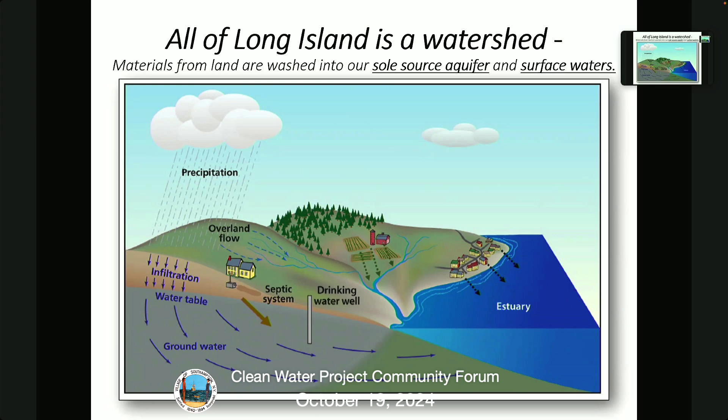Things have changed a lot here in the village of Southampton, in Suffolk County, in the town of Southampton. This is indicative of that, the population growth of Suffolk County from the 20th century through to today. As it turns out, at this point, Suffolk County is the third most populous county in all of New York State. It's Brooklyn, Queens, Suffolk County. And Suffolk County, actually, since 2020, is the only downstate county to have grown in population.

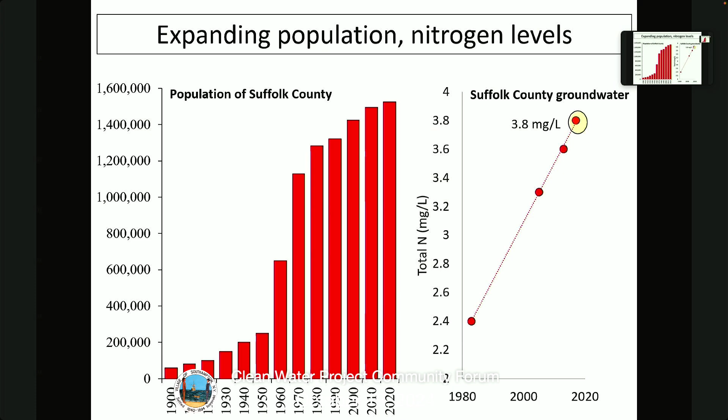All the 5 boroughs shrunk, Nassau County shrunk. You may know New York State is a shrinking state, right? We lost representatives to places like Florida and Texas. But Suffolk County continues to grow. And with that comes changes to the quality of our groundwater, shown here in the rising levels of nitrogen in our groundwater.

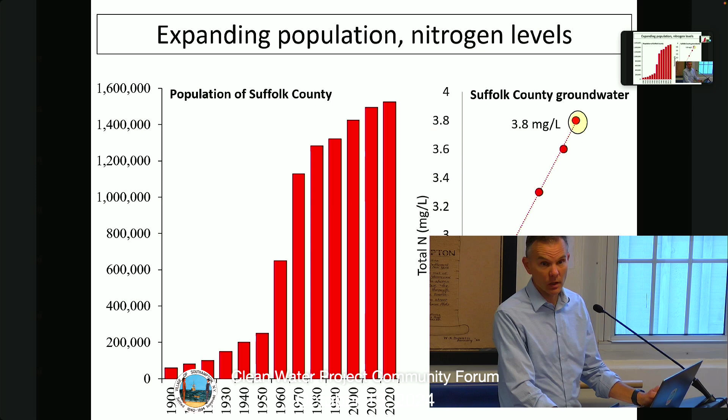That rising level of nitrogen can have a big effect on coastal ecosystems. They can stimulate algal blooms, and the algal blooms, as they decay, can starve our coastal waters of oxygen.

I'm going to focus a lot on Lake Agawam, but what I'm showing you here is a map I just finished preparing in collaboration with help from the Nature Conservancy. This is monitoring my laboratory has been doing during the summer of 2024, data hot off the presses, June through September. It shows the widespread nature of harmful algal blooms and hypoxic zones, also known as dead zones, areas with low levels of oxygen. These all come from the overloading of nutrients, specifically nitrogen, into coastal waters. Lake Agawam is called out for low oxygen at times and blue-green algal blooms, but it's not alone. Here in the South Fork, many areas are experiencing both low oxygen conditions and blue-green algae blooms.

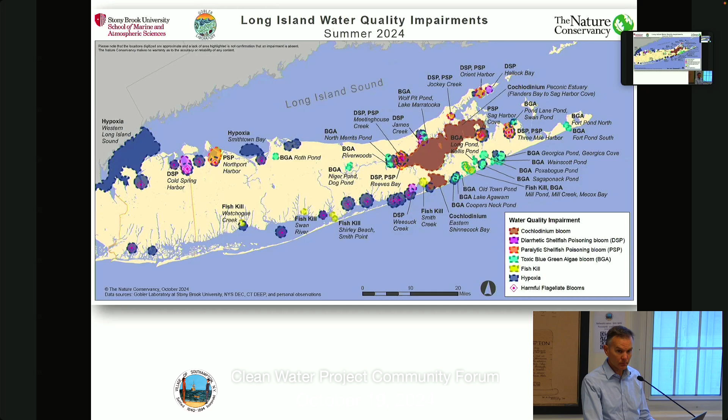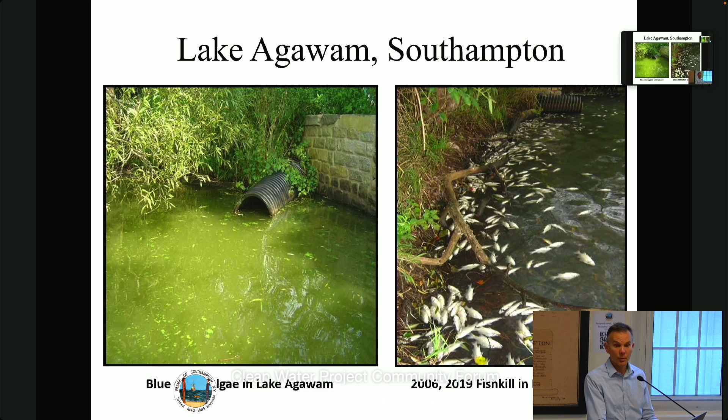Now to put the focus squarely on Lake Agawam, I've been studying this lake for more than 20 years, and it has a long history of these blue-green algae blooms, which I'll explain, and also even fish kills that have occurred because oxygen levels have gone literally to zero at times.

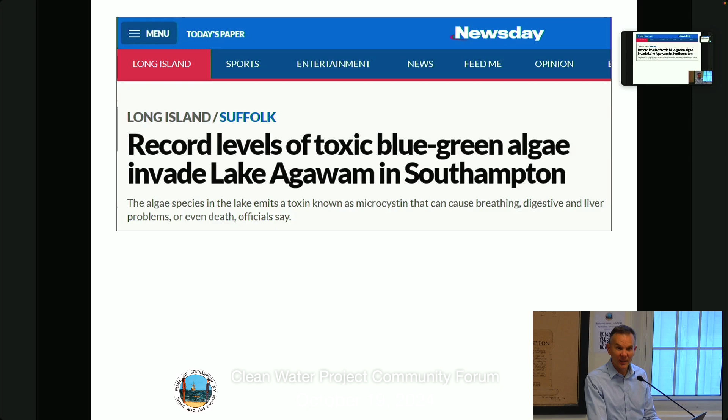It's been notorious. Here's a headline from 2018 — the thing you don't want to see in the news, or want to make news for: record levels, but the wrong kind of record. In this case, toxic blue-green algae. This is from 2018, showing across New York State the top 10 lakes for the number of weeks they've been listed by the DEC for having blue-green algae blooms. Below you see the pictures — they're not fun to look at, really. Again, this is from 2018. There's been a little progress since then, and I'll talk about that.

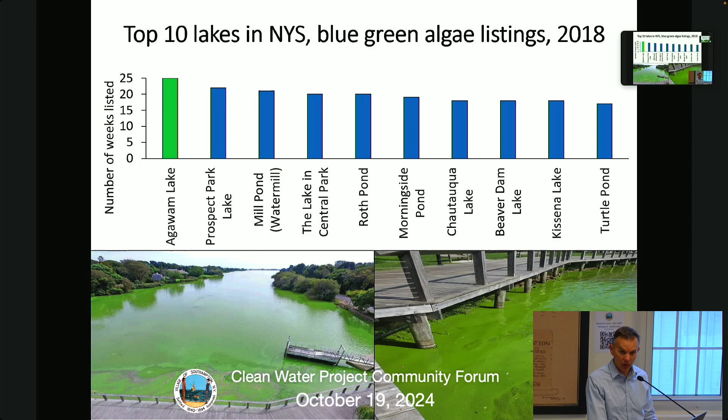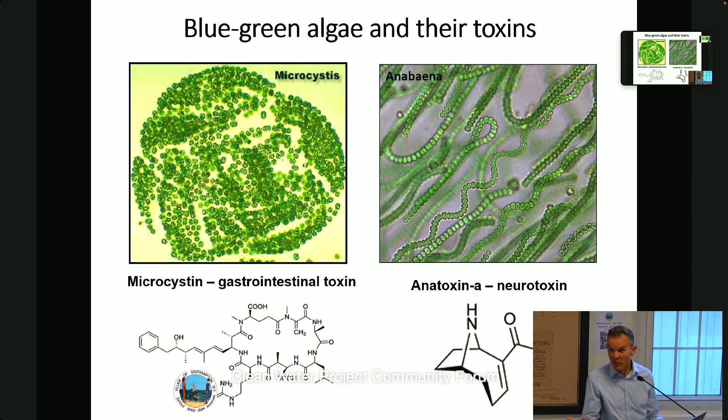Just to hone in on what these blue-green algae are, here are microscopic images of the two most common types. They're worrisome because they make toxins. The microcystis on the left makes microcystin, a gastrointestinal toxin. Anabaena, which is less common in Lake Agawam but has been there, makes a neurotoxin called anatoxin A. When these toxins were first identified by scientists, the pejorative terms they used were fast death factor and very fast death factor, because when they isolated the compounds and administered them to mice, which is how it was done back in the day, the mice died fast and very fast, respectively.

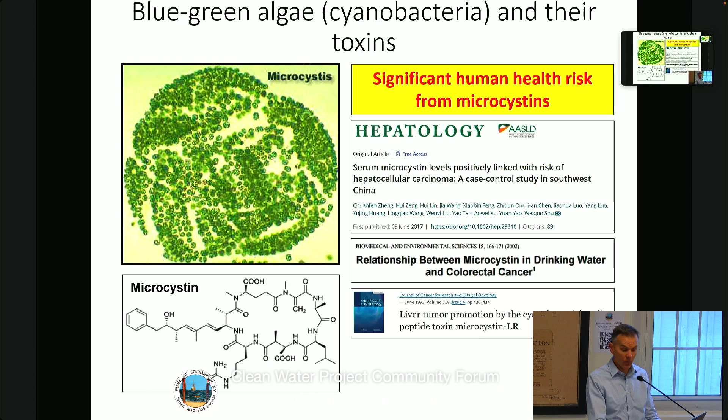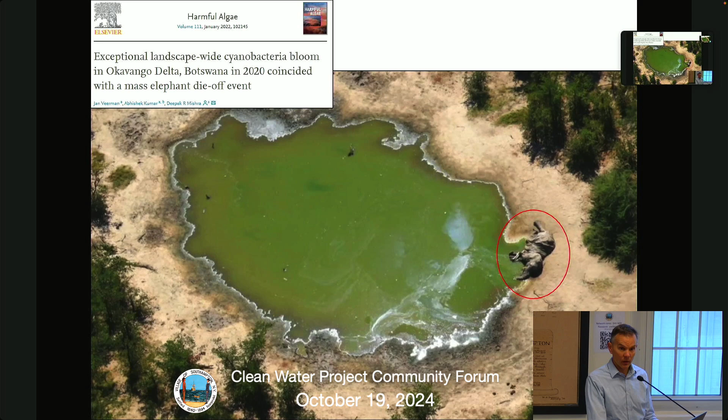So these are serious compounds. They have human health implications with regards to promoting cancers. Now, thankfully, we're not drinking the water from Lake Agawam, but that's obviously a troubling outcome. Outside of humans, these toxins can be dangerous to animals. Not many years ago in Africa, there were events where these blooms led to the death of endangered elephants, very large mammals. And mammals more dear to our hearts, pets — specifically dogs — can be very vulnerable to these blue-green algae blooms.

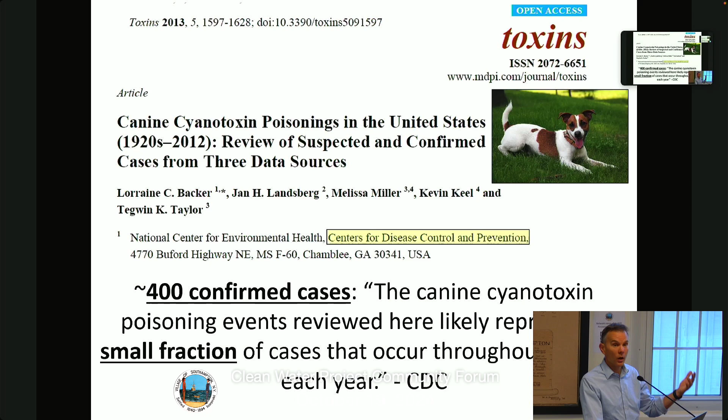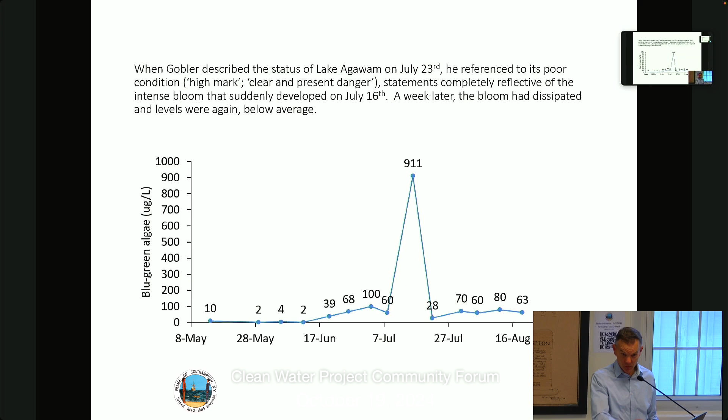Someone questioned, I'll be honest, my integrity when I said later in the summer that Lake Agawam was improving. Here's the data to show that it was improving, what I was speaking to. So again, when I say clear and present danger, this is what I was referring to — this lines up exactly with that data point the week I was speaking. And when I said Lake Agawam had improved, here's the data that I was referring to.

When I spoke in August, on average for 2024 up until that point, Lake Agawam had actually seen its best year in a decade. Still, a lot of work to be done, however.

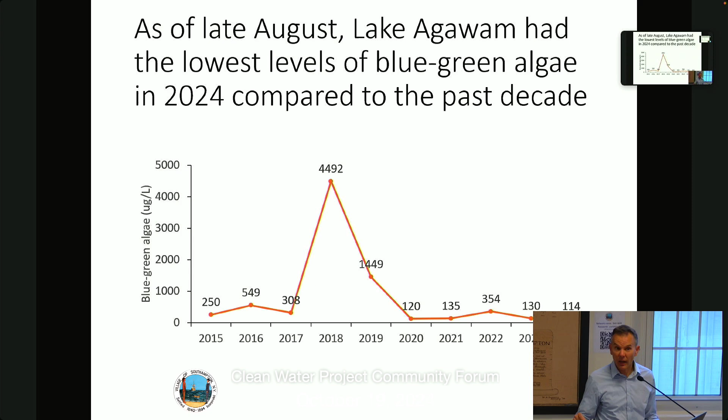First, note 2018, that record-setting bloom in the headlines of Newsday. You see where that landed. There has been progress since then, but there's still a lot to do. To get below the level the DEC wants to see Lake Agawam at, below 25 micrograms per liter, we're still fourfold over, so there's still a lot of work to be done.

So let's talk about some of the work to be done. But before that, just to point out one thing: what's controlling these algal blooms. In the literature, you could see it might be nitrogen, it might be phosphorus.

We've done these experiments over the years, and this is a simple experiment where we took water from Lake Agawam, added nitrogen (N), phosphorus (P), and then nitrogen and phosphorus together. What you see is a very strong increase in both the total phytoplankton community and microcystis, that toxic blue-green algae, from nitrogen. And phosphorus, no — if you add phosphorus to the nitrogen, it's about the same outcome. So it's really the nitrogen that is a big driver here.

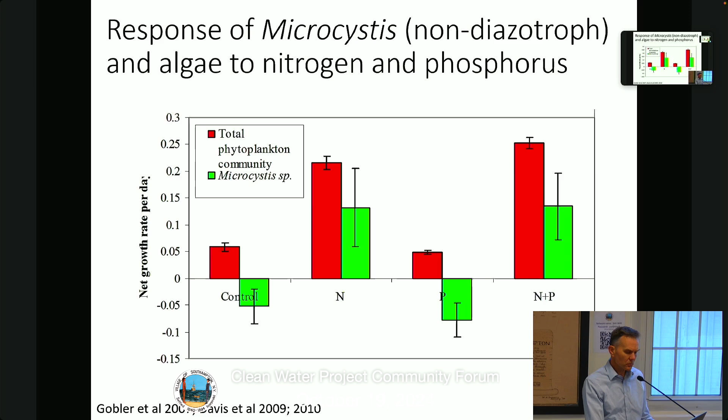We've done studies with regards to where the nitrogen's coming from, and this is how it all breaks down. The big answer is wastewater. Wastewater from Main Street, wastewater from around the watershed, wastewater from the homes around the lake. There's certainly a component of fertilizer, but wastewater is the very strong source here.

Chris, can you mention how far north or how large is the watershed for Agawam? It goes as far north or even further north than Sunrise Highway. I'm going to show some pictures later — there's an image of it over here, but I have a slide showing it later. It's a good question, and I'm going to talk more about that later.

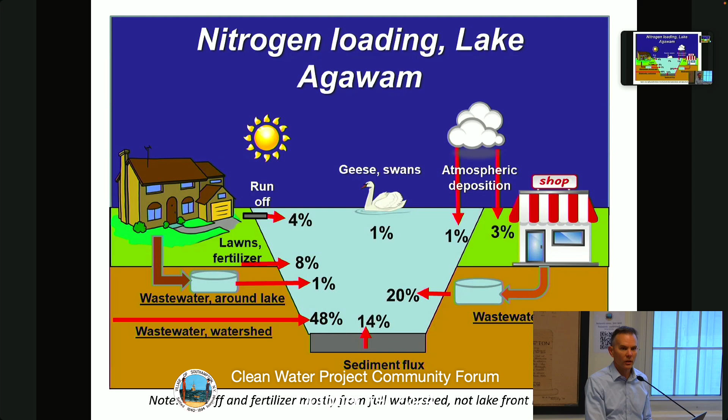Phosphorus is also important, and we see that coming a lot from the sediments.

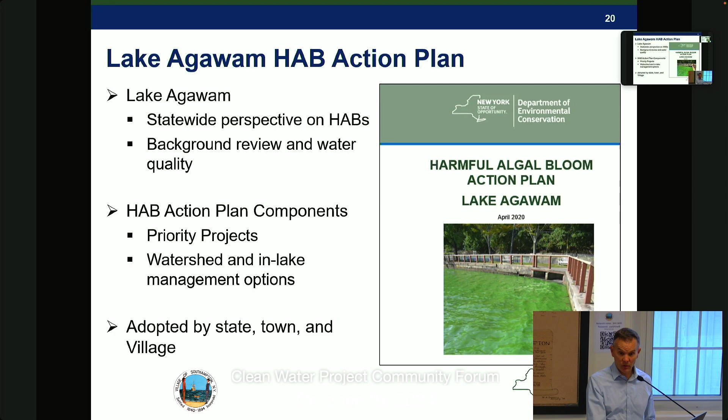For those of you who are not aware, we were very fortunate to have Lake Agawam called out as one of 5 lakes in all of New York State that the DEC honed in on, creating a harmful algal bloom action plan, completed in 2020. This was adopted by the village, the state, and the town — something everybody can get behind. Because of this, there's been a lot of positive action already. We're on the right trajectory with more work to be done.

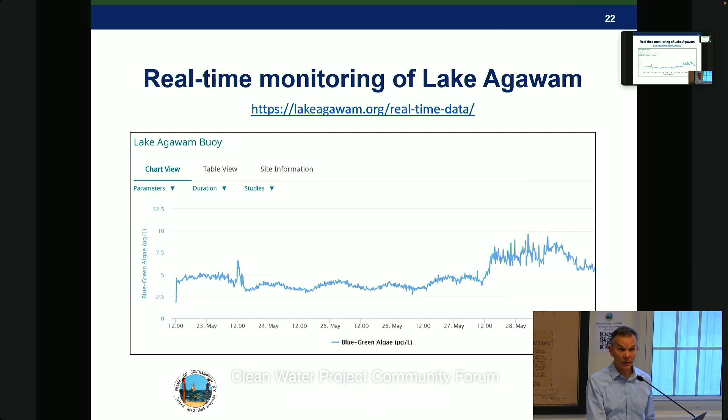Just going to roll through some things we've done. Firstly, we have an autonomous buoy, supported by the Lake Agawam Conservancy. This buoy gives us real-time measurements of what's happening in the lake, which is really important. My lab group is out there at least once a week, sometimes twice a week, but this buoy can tell us maybe we need to get out there even sooner than that, or maybe something happened overnight — things can happen that quickly. So that's been a real value.

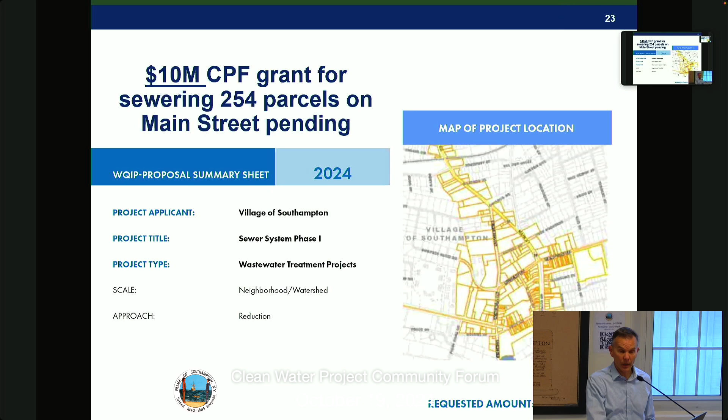We're going to hear all about the plan for sewering the downtown, so important. There's a pending CPF grant to support that, and as I showed in that model, it represents almost a quarter of the nitrogen going into the lake. So that's very important.

In 2020, I think about 2021, I worked with the village to get a grant from the state, specifically to work on upgrading septic systems and something known as a permeable reactive barrier. I'm going to talk about that now.

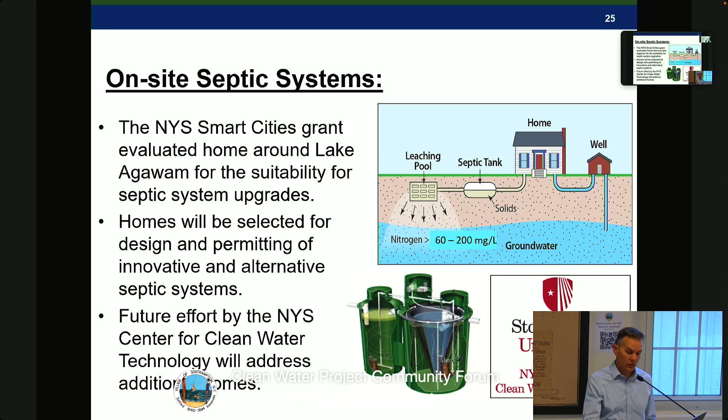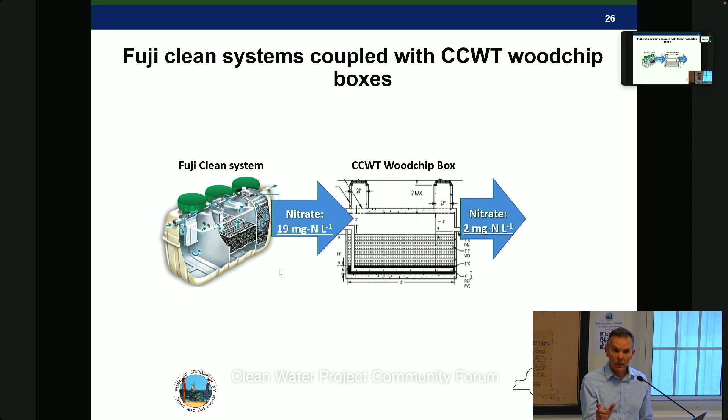On the septic system front, with that grant, we worked with homeowners to come up with plans to upgrade a traditional system to one that leads to lower levels of nitrogen coming out of the septic tanks. In all cases, the ones we designed were something called a Fuji Clean system, but linked to something we've created at Stony Brook University. There, I direct the New York State Center for Clean Water Technology, and it's called a wood chip box. When you link these two technologies together, you can actually achieve exceedingly low levels of nitrogen.

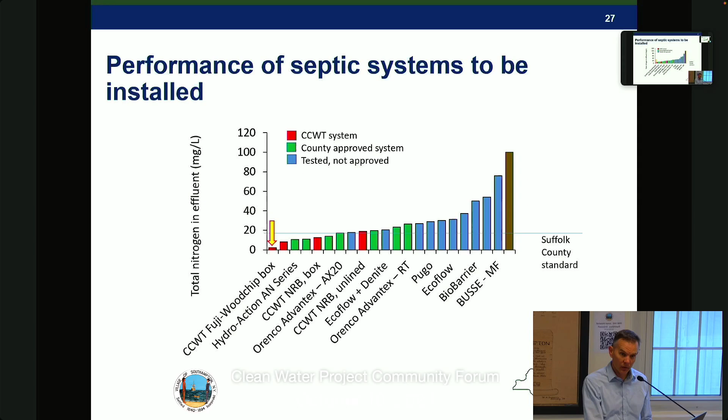So we're excited about that being a technology that can be installed right on the lake, and we've got several homes ready to go to get these upgrades done.

There's also been a lot of work on stormwater management. When I first started working on Lake Agawam, when there was a rainfall event, the whole village was specifically plumbed to drain into Lake Agawam. So all the water would just fly down all the streets, from the drain at the far north, to the northwest, to the northeast, to the south, it all came in. That's changing, thankfully. There's been a lot of effort made by the village, by the Lake Agawam Conservancy, in putting in things to slow the flow of water into the lake, divert it, and absorb the nutrients before they go in.

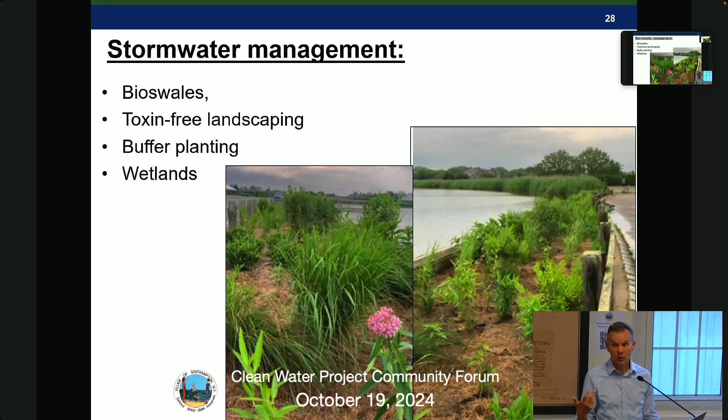That runoff also contains a lot of bacteria, right? So by putting in things like bioswales, buffers, and wetlands, you can slow that flow, remove nutrients, and also potentially remove pathogens. And just one more thing, about native plantings along roadsides - there's just more details, but in essence, it's what I just said. These things are going to serve the purpose of slowing the flow of water so it's not flying into the lake, removing nutrients, nitrogen and phosphorus, and removing pathogens. And the more vegetation you have in these buffers, the better.

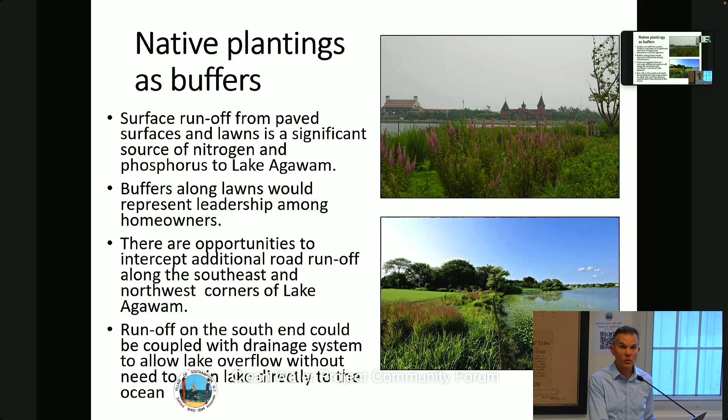There are about 100 people living on the lake. There's 7,000 people in that watershed. So everybody is contributing. What's happening on the lake is important, but what's happening throughout the watershed is also important.

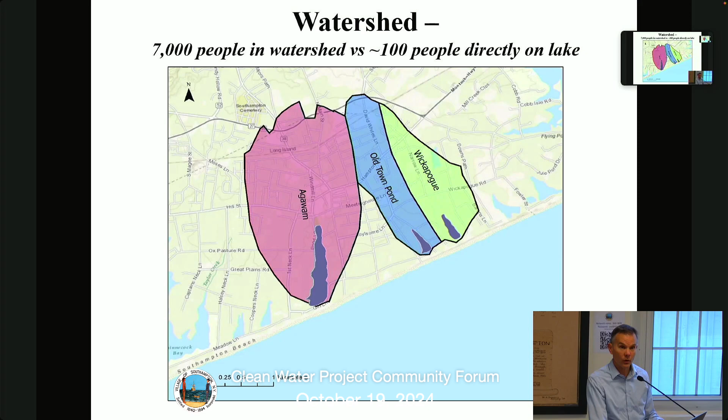And that's what I'm going to highlight now, because these two projects, the final things I'm going to talk about, have to do with Proposition 3. With the passage of Proposition 3, both of these projects will be implemented. And they're both meant, just to go back and emphasize this, to address what we would call legacy nitrogen - things that don't address the root source, but get the nitrogen out of the system now while we can.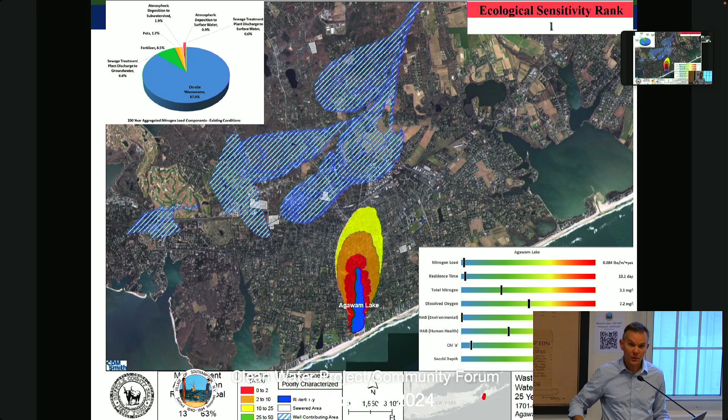Once nitrogen in the groundwater is converted to nitrate, which happens after about 5 to 10 feet, that nitrate is very stable, and there's almost nothing that's going to take it out unless it runs into a wetland or something like that.

So now I'm going to talk about what's known as the AECOM algae harvester. That would be on the Dozier property, which is part of Proposition 3. And there's the location, but I want to get into some of the details.

For those of you who don't know, this was already used in Lake Agawam, so that's why it's exciting to actually bring it back. It was put on Lake Agawam for about a 2-week period in 2019 as a test case - would this work? And the results frankly totally shocked me.

This system removed more than 90% of the nitrogen, the phosphorus, the blue-green algae, and the blue-green algal toxins for the water that was passing through it.

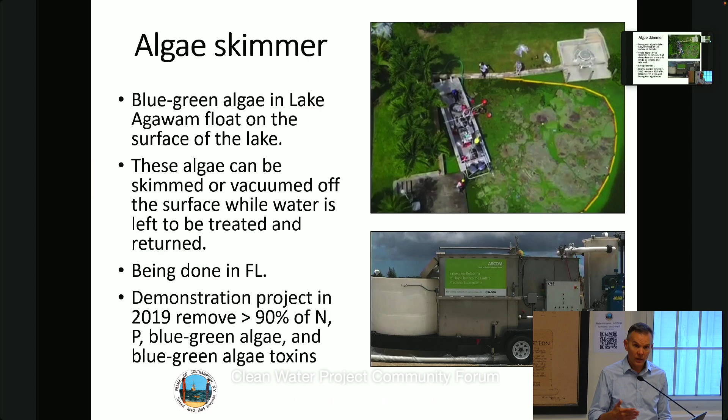So essentially the way it works is - let's see, do I have an image? I don't remember that. What was the question?

Same place - it was in the same place, in the parking lot back by the playground. Yeah, it was set up for about 3 weeks. I think it was there for 3 weeks, operational for 2 weeks.

So this is just an image to get a sense of it - I can't remember if this is fully accurate, but I think this is roughly how they had it working. There's a very large boom, the water comes in, and the idea is it essentially passes through a conveyor belt, and the clean water goes through.

But because of the attributes of the blue-green algae - they're particles, firstly, and they tend to float at the surface - as the water goes through that conveyor belt, think of it as like a sieve: the water goes through, the algae are trapped at the surface, and the water that passes through has had 90% of the nitrogen, phosphorus, and blue-green algae removed.

And now you can see why that would be, right? That's the blue-green algae - that's what's getting removed, and so that's going to get taken off. In some cases, they think they can even make bioplastics out of it. That might be aspirational, but the important thing is that it's getting taken out of the lake.

I want to go back now to this slide here. In some ways, this whole approach - like we're going to filter the lake - may seem foreign, right? But I want to emphasize this is actually an approach that the DEC wants to see implemented, and is implementing, all across New York State.

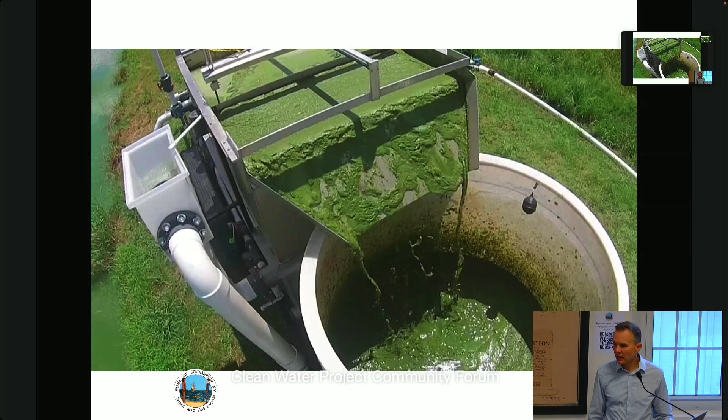The other thing is, on the algae duster, does it spew anything up into the air? I'm a little concerned about the children's playground. Not to my knowledge. I think it's going to be contained. I think you saw, and it's all supposed to be contained, by and large, in there. So I don't think that's going to be an issue.

As far as what I've heard, the mechanical sound is supposed to be the equivalent of an air conditioner. Chris, I went by the one when it was installed before. You could hear a hum of the pump, the water pump. The sound really sounded to me like an air circulation system that I assume was filtered. That was the larger sound, and the whole thing was like an air conditioner. The little ones are right by the wall. In my sense, it would be no different, as far as what gets emitted, than the cars in the parking lot, really.

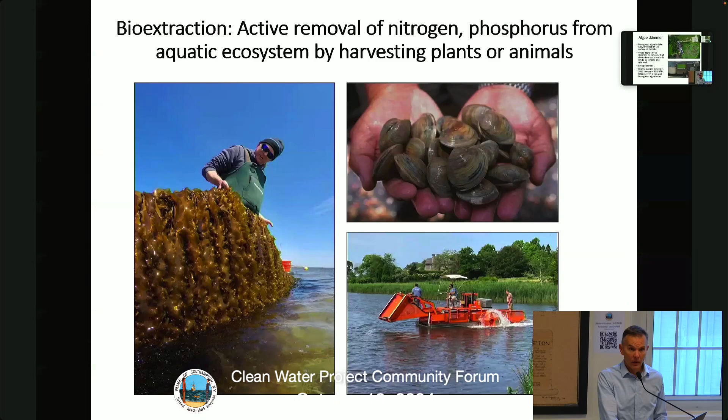Can the booms be relocated around the lake to try to encourage flow through all parts of the lake? I think they can be extended, yeah. Talking with AECOM, the company that does this, they're actually going to have a discharge pipe, all underwater or underground. Pumps are submerged at the north end of the lake. There's a pipe to the south end for the discharge. So they're taking water out of the north. The entire lake is the boom, so the circulation is south to north.

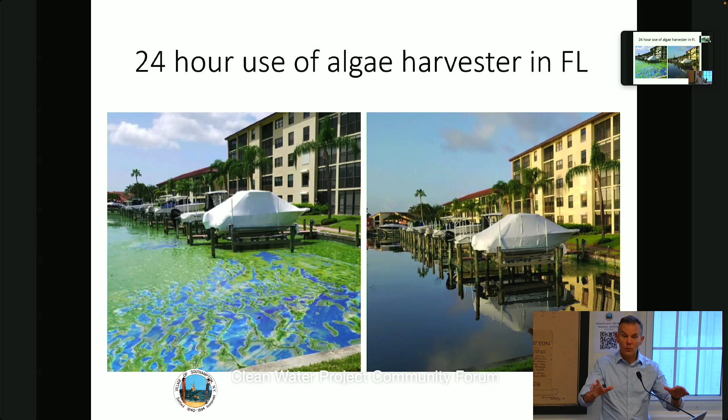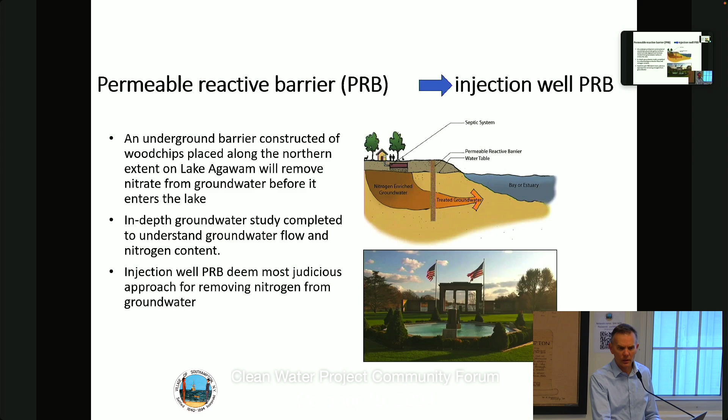The last thing I want to talk about is the idea of a permeable reactive barrier, specifically something we're working on for the Dozier property called an injection well reactive barrier, or PRB. In the upper image, as contaminated groundwater flows towards a water body, you can put in something to intercept that groundwater that will react with the nitrogen and pull it out. In the most traditional case, it's simply a barrier of wood chips. When the nitrate hits the wood chips, it denitrifies and the nitrogen is turned to nitrogen gas. We're working on a slightly different approach, the same concept but different, called an injection well, because the nitrate coming into Lake Agawam seems to be a little deeper than we'd want to put trenching in.

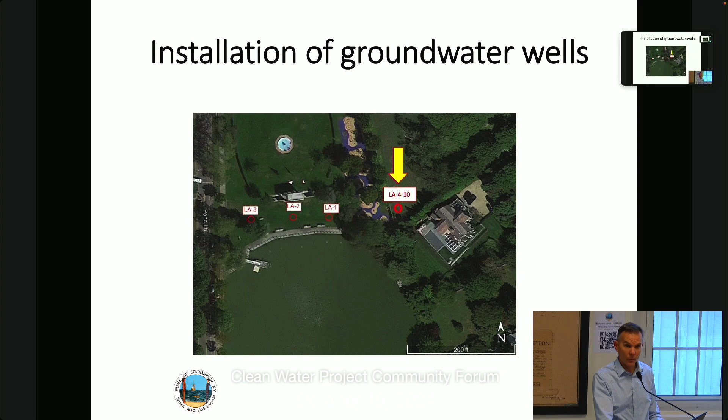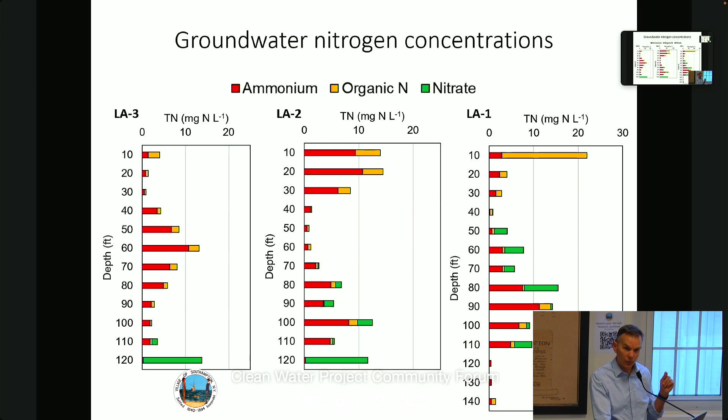So we've been working on this for a while, since that Smart Cities grant I got way back in 2020 or 2021. The original idea was to put this across the parkland to the north. We did some work, and then eventually ended up looking more carefully to the east, and I'll show you why momentarily. When we looked to the far north, we did find some nitrogen, but found two issues: one, a lot of it was ammonium and not nitrate, and reactive barriers work great for nitrate, not ammonium; and two, a lot of it was deeper down.

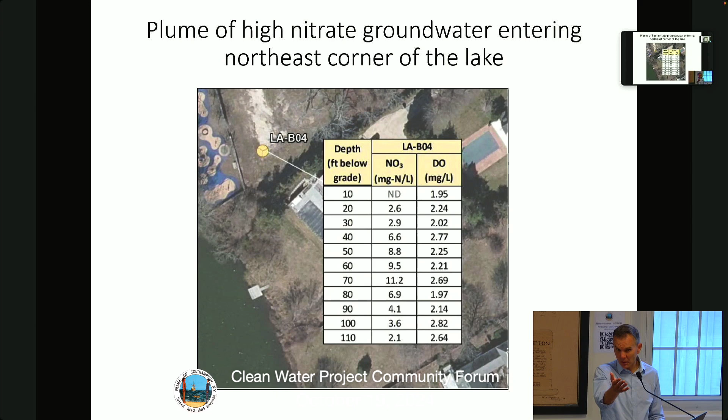And so, in speaking with different engineers who have worked with denitrifying reactive barriers, you wouldn't want to put in a trench for a reactive barrier below 30 feet, right? So maybe that would work, but you'd miss most of the nitrogen. That's why this injection well is going to be a better approach.

So I wrote a CPF grant for this on behalf of the village in 2022. It's supported by the town. We've done a series of studies. You can see in the lower right conceptually where this would go.

And just to be clear, this is addressing the plume of nitrogen coming off of Main Street. That's what we're dealing with here, right? We've got all these stores and homes and everything that's coming from Main Street and down, restaurants. That's the plume we're going to be hitting here by virtue of its location.

And this just showing more of it. Essentially what this is, is a series of wells, and you can see there it's about a half a dozen. These wells are drilled down in such a way, and so the dark is the actual wells. The larger concentric circles that intersect are the sphere of influence of each well.

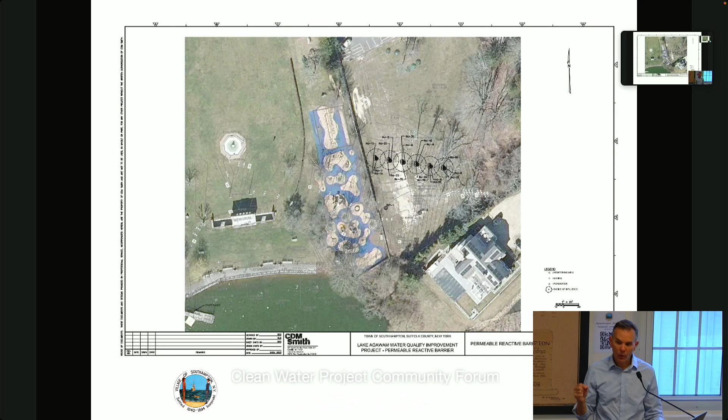And so what essentially the approach here is going to be is using something called emulsified vegetable oil, which may sound crazy at first. But the emulsified version of this is such that once it goes down, it's simply a carbon source and it doesn't migrate. The groundwater flows through, but this carbon source stays in place.

So just like with the barrier, where the wood chips are there to provide—why are the wood chips there, right? They're a carbon source. The wood chips leach carbon, specifically cellulose, from the former tree. And that cellulose is the carbon that bacteria use to create an anoxic environment to therefore promote denitrification. In this case, that emulsified vegetable oil is the carbon source that stimulates the growth of the bacteria that reduces the nitrogen, that then stimulates denitrification and converts the nitrate into nitrogen gas.

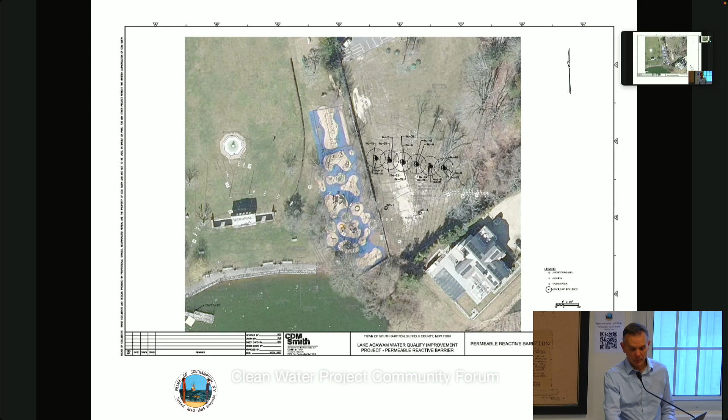And so, just to show it in a vertical here, again, the nitrate that we really want to treat is deeper than we can trench. So that's why this will work well. You can see where the injection point is, and the nitrate goes through in that area around the well. That sphere of influence—you can see they call it radius of influence.

That's the area within which the emulsified vegetable oil moves, and this of course has been done in many parts of the country already, and perfected such that it's not migrating beyond that little sphere of influence. But what you get is what's coming out on the other side has almost no nitrate in it because it's been denitrified off. And again, this is going to be part of that property.

Two quick questions. What's the source of the water? Is it the water being drawn out of the lake and put into those injection points? Or I think there's maybe a mix of that water along with the emulsified vegetable oil.

Okay, and how long—what's the lifespan of the oil as a source of carbon? I think the approach is going to be to put it in, it should last at least a year, and then test and see if it needs to be refreshed thereafter.

What's the schedule for the implementation of the injection well therapy? If Phase 3 passes, it can, I think, begin in the spring. Oh, sorry, Proposition 3—if Proposition 3 passes.

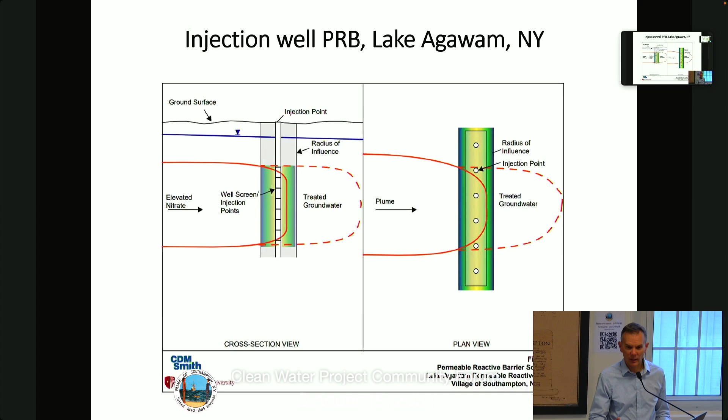Sorry. Yeah, and so that was all I was going to present. So I appreciate everyone's attention. Thank you.

So, during my time period on the village board, we brought this up about sewage treatment a long time ago. We just couldn't seem to get the public interested in going forward. But when we first started having meetings about it, many engineers came. We didn't invite them, but they came. And their concern, and this is what I want to ask you about their concern—let me take this off.

Their concern was that because Lake Agawam is spring fed, they were concerned that the pressure of the effluents—which we don't want, I'm 100% in favor of doing this—but the effluent puts pressure on the springs, which makes the springs work in the lake.

They said that they have seen many places where they have eliminated that around a pond, and the pond dries up because there's no pressure on the springs. Nobody has talked about that, and I don't know if you've looked into it, and it's a very important question.

I think that is not going to happen, and the reason is because of the size of the watershed. If you look at the size of the watershed for Lake Agawam, that's all contributing fresh water. So what we're really talking about is, if we sewered that whole area and pumped that groundwater out to the ocean, then that could happen. In fact, that has happened in places like Nassau County. They've literally lost water bodies because of that.

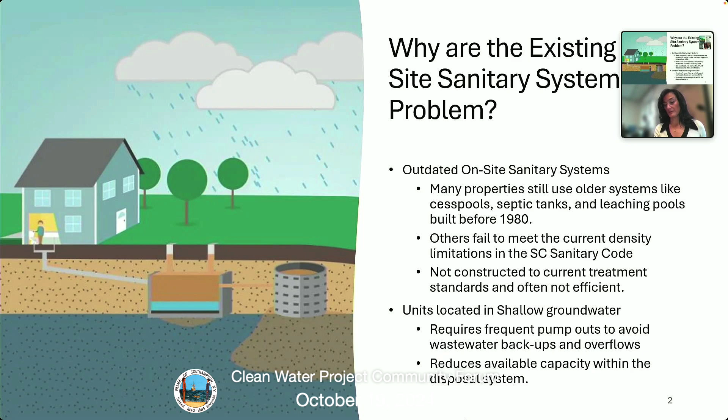So here again, we're talking about why it's a public concern, and it's basically the combination of those two issues. One issue is the systems being older, and with groundwater very close to the surface, which becomes a faster travel path to the lake, as Dr. Gobler was explaining in his presentation. This area is the area of influence where this nitrogen travels faster to the lake.

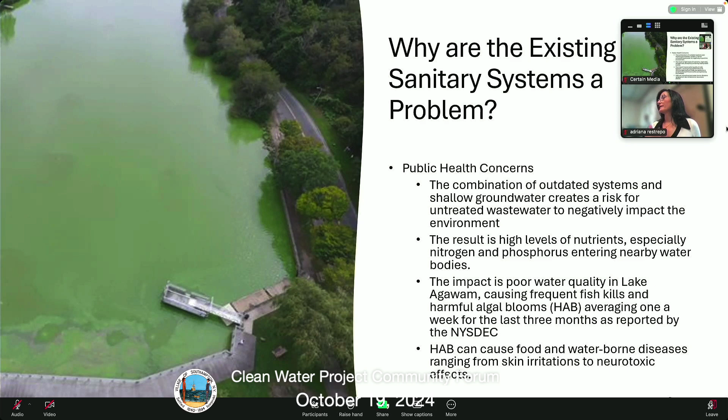And recently, reports from the New York State DEC show that the blooms are happening basically weekly. You can see in one of the posters their report and the weeks that this has happened.

So what's the solution? In addition to all the measures being taken for addressing the problem happening right now with the accumulation of this nitrogen and the algae bloom, we're also looking at a long-term plan. The long-term plan is to actually collect the sanitary sewers and convey and treat them so that it never reaches the groundwater or the lake.

So as we said before, this is of public concern because it reaches the groundwater and eventually reaches the surface water too.

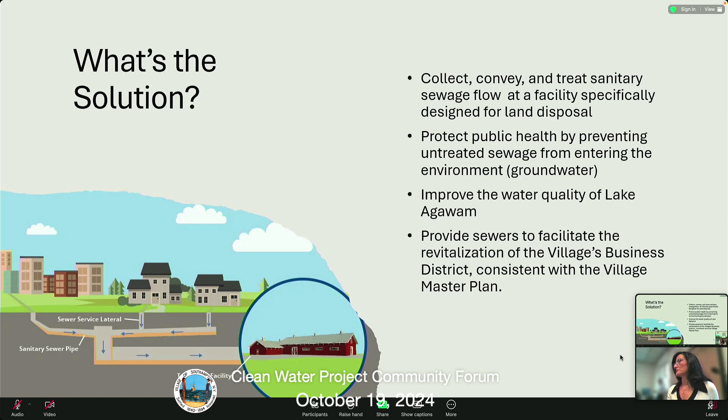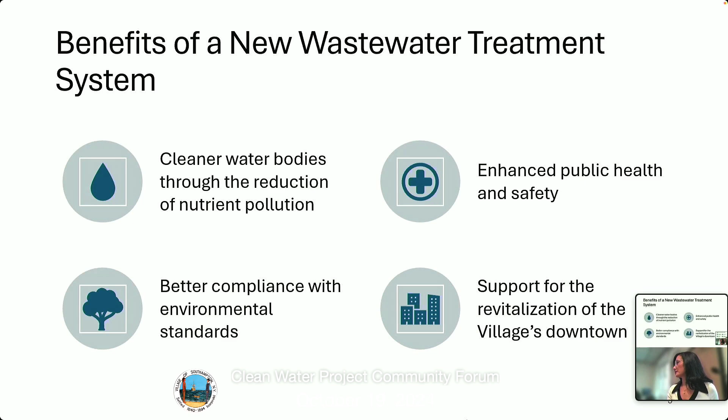So what are the benefits of having this wastewater treatment plant? The benefit of collecting it will be preventing it from getting to water bodies like Lake Agawam. It will have better compliance with environmental standards, as the systems presently in these parcels are not up to code, and it will also enhance the public health of the area and help with the revitalization of the downtown area.

So what is the process to create the sewer system? The first thing was to decide what the service area was about. This comes into play because it's within the watershed of Lake Agawam, so these are the parcels that impact the lake, that have the greatest impact on the lake.

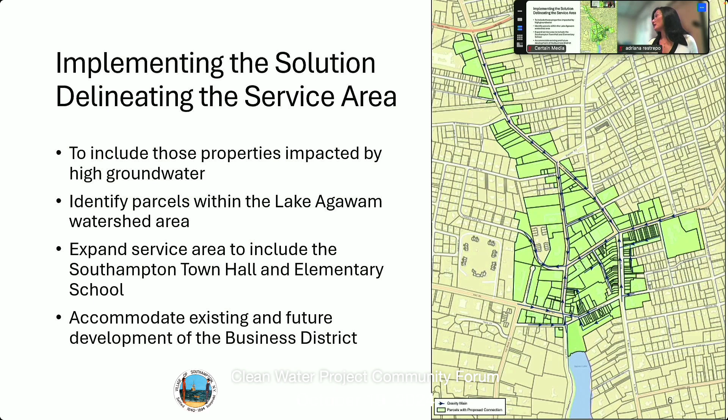Collecting the water from these parcels creates a faster benefit to the area. The service area was also expanded to include the town hall and the elementary school, and it accommodates the development of this business district.

So in continuing to implement the solution, the first thing was to look at the flow—what's the flow of the sanitary flow coming from the parcels.

There are a couple of steps taken to do this. One is to look at each of the parcels and the use of each property. The Suffolk County Health Department has specific standards—if it's a restaurant, it has a certain flow based on the number of seats the restaurant has; if it's a retail space, it's a different number based on the square footage. So we look into the calculation of each of the parcels in this service area that I spoke about.

The next step is to look at the existing flow, so the present use of each of those parcels.

For the future flow, we look and see if there is development proposed for the area. We look specifically at certain zones where there are vacant parcels, or a change because of how the master plan has been designed for the village. The final step is to decide where all this pipe is going to come and how it's going to be collected and sent for treatment.

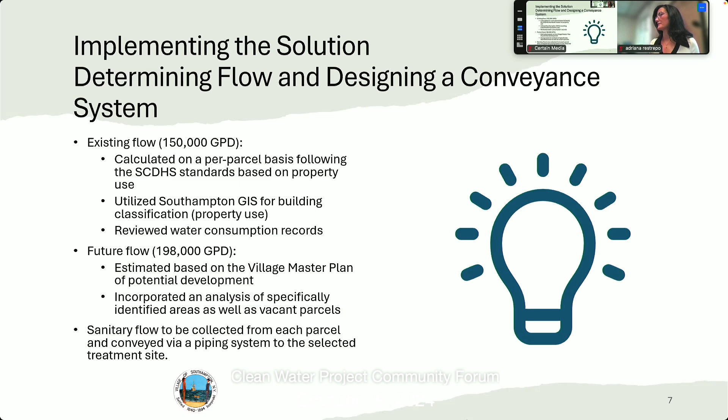When was that study done on flow? We started in 2021.

So we're looking at different treatment methods. We considered decentralized systems, looking at centralized systems versus on-site systems. In this case, the IAs, the innovative alternative on-site sanitary systems, require individual units, need routine maintenance, and are self-monitoring systems. There are pros to using this system in areas that are not as densely populated as this downtown area.

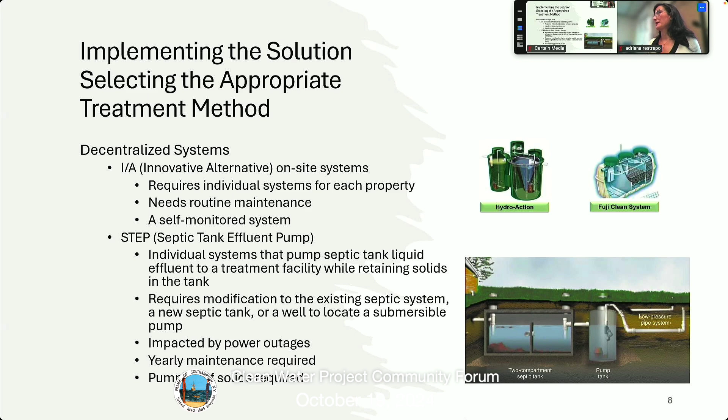Another system that was suggested at some point was STEP. It consists of treating the liquid effluent from the septic tanks. It requires installing either a pump within the existing septic tank or separate from it. It requires power, so if there's a power outage, you need to stop using anything that contributes to the sewer system, or get a generator. It needs yearly maintenance, and the solids still need to be pumped out of the septic tank, less often than a normal septic tank, but they still need to be pumped out.

So we're looking at a centralized system, where water is collected from the area and sent to a treatment plant. The plant is designed under the Suffolk County Health Department standards and needs to be permitted. The quality of the effluent is constantly monitored and reported to the county and to the DEC, which prevents any issues with the effluent from the plant.

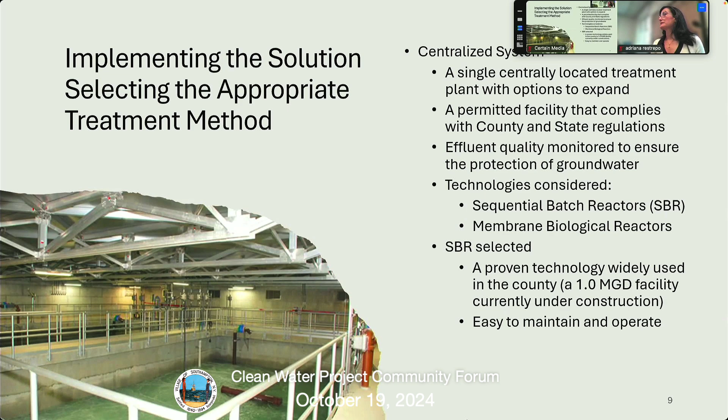The technologies considered for the biological process included sequential batch reactors and membrane biological reactors. For the sequential batch reactors, or SBRs, this was the selected technology. It's a proven technology used widely in the county — there's currently a 1 MGD, one million gallons per day, plant being built near the Forge River, which is a county plant. It's easy to maintain and operate.

So, selecting the treatment plant location: the idea is to have a parcel located in proximity to the service area, with deep groundwater, because you want to slow down the seepage and provide better conditions for infiltration. You want a parcel large enough to accommodate the proposed treatment plant and effluent disposal system, about 4 acres. There are limitations on the dimensions of the parcel because of setbacks — the process building needs to be at least 150 feet from adjacent parcel lines or boundaries. Not all 4-acre parcels work well, because more boundaries mean bigger limitations, as opposed to having a road or train tracks nearby, which extends the usable area of the parcel. The setbacks are 150 feet from the property line and 200 feet to habitable structures.

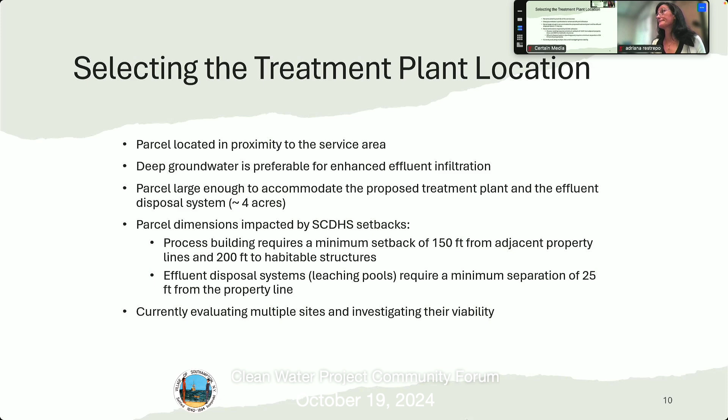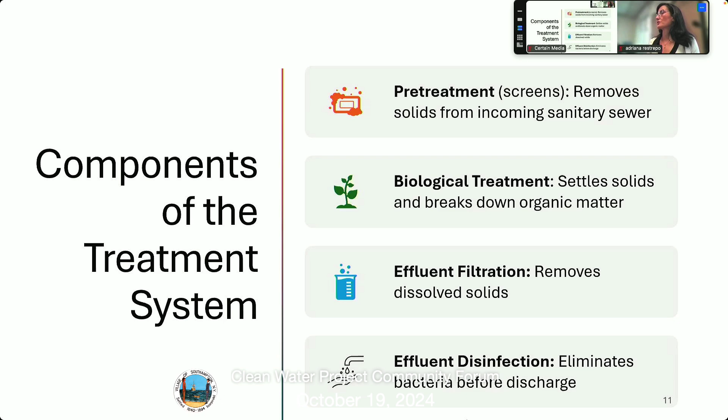A little more on the treatment system: in addition to the biological part, the SBR, there's a pre-treatment ahead of it, which is essentially a screen that removes the bigger solids from the sanitary flow. Then the biological treatment takes over — the bacteria consume the organics from the sewage — and it proceeds to filtration and then disinfection. Filtration removes the dissolved solids, and disinfection kills bacteria.

So a little bit more about this biological process within the plant, the SBRs. What it does, as I said, is the bacteria will be consuming the organics, and the way it does it, the tank fills in first, then the bacteria starts reacting. For that, you give the bacteria enough air and time. Basically, that's all it is. It's nothing fancy.

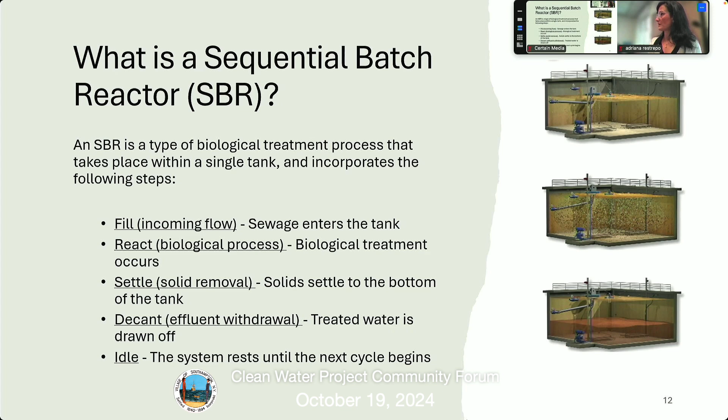Another way that things are improved on the aesthetic side is they're usually surrounded by vegetation, big trees around the building. The plant is proposed to be enclosed in a building, so all the process equipment will be inside with appropriate setbacks, as I explained.

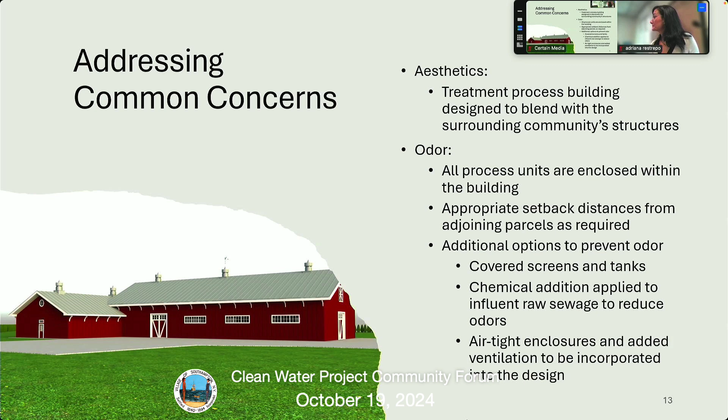It's not offensive. But I also point out that there is a sewage treatment plant currently in the village, at Southampton Hospital, surrounded by many fine homes, none of whom, to my knowledge, are complaining about odors from the existing 80,000 gallon a day treatment plant at the hospital.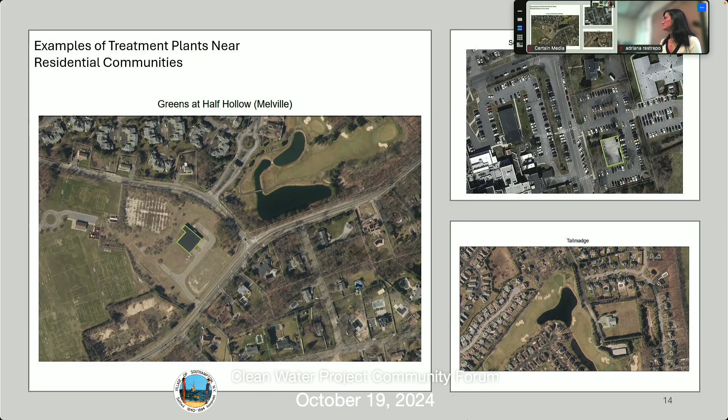No, John, I just want to point out, because many of you have read in the Southampton Press over the last few years, and we've looked at sites, neighbors who are convinced that their property values will collapse when a sewer treatment plant is put next to it. These are multi-million-dollar homes in Melville, all around the plant, and that's what's, I think, so important about that photo. We will never have anything happen in this village if we let all the people with all their myths tell everyone that their property values will collapse.

It certainly hasn't happened on Wickapogue Road, as far as I know, given where property values on Wickapogue Road were thirty years ago versus today, with the plant, and it certainly hasn't happened in Melville.

So just to add on, and then I'll let Adriana go on, on a 4-acre site, the building is somewhere around 12 to 15,000 feet. So another way of putting it is you have permanent open space of virtually all of a 4-acre site. The rest of the site is really the leaching field, which is the cleaned water percolating into the ground.

So this is going a little bit onto the concerns about groundwater and the impact of the plant onto groundwater. What this is describing is, as I said before, the plant is designed within the Suffolk County Health Department standards, which says less than 10 milligrams per liter in that effluent. This comes to what Dr. Gobler was explaining about this being a component of the cleanliness of the water coming out of the plant.

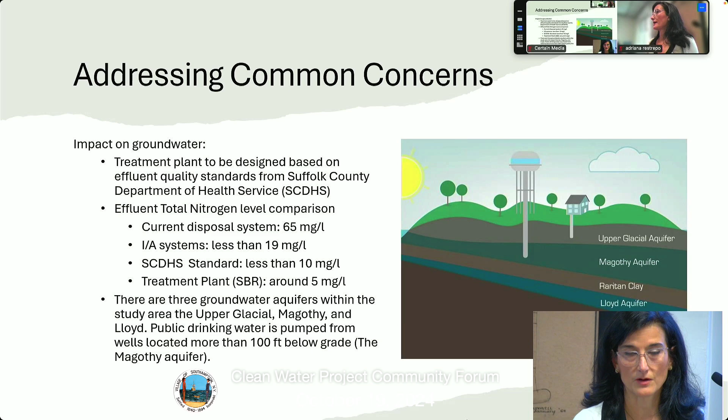We also want to point out that the water from the public wells comes from the Magothy aquifer, which is more than 100 feet below grade.

So this goes into the project estimated construction cost. This was based on the conceptual design of the plant, completed in 2021. However, the values were updated to the midpoint of construction around this time, so it needs a little bump depending on when construction starts. It goes through the different parts of the system.

It's the collection system, estimated to be 11.5 million. The pump station: once the flow is collected from the parcels, it needs to be sent to where the plant is going to be, the sewage treatment plant. So total estimated capital cost of 35.5 million, with an operating and maintenance cost of about 400,000 a year.

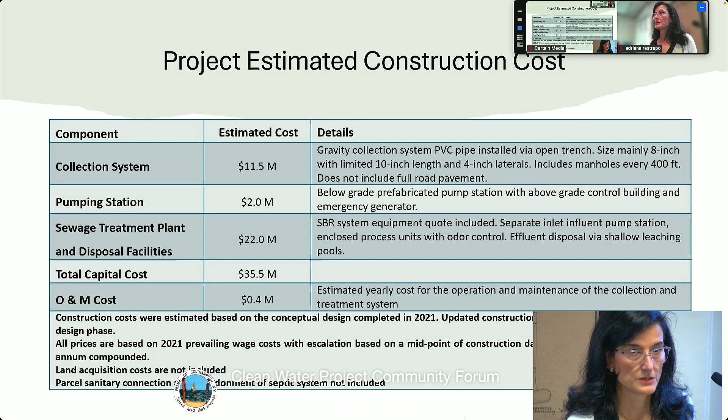How many pumping stations would be in this system that's currently zoned? On the conceptual design, we see only one.

You say 100% sure there will be no odor in the area? Can you say that with no doubt? I can't say 100%. There is a reality, a possibility, but the reason for odors wouldn't be normal operation of the plant. It would be an upset, which is very uncommon, or if they left doors open. It's not something that should happen or will happen. The village will maintain and operate the plant so it runs how it's supposed to run, with no odors outside the building.

I know people that live next to the hospital treatment plant, and they didn't even know it was next to them, and that's an old technology. They had no awareness that it was contiguous to their property. It's much smaller, and that plant is rated for 104,000 gallons per day.

I always think my voice is loud enough anyway. You're good. Okay, so there are some other plants in the area.

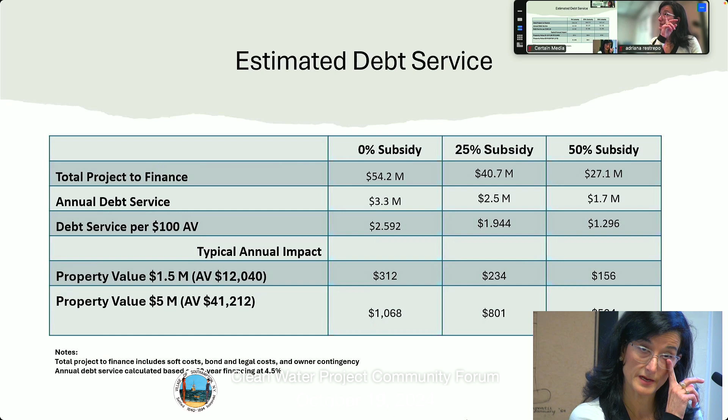Right now there's a lot of things in place to obtain different funds from different sources. One of them is the CPF, which is currently what Dr. Gobler was mentioning, currently an ask of 10 million. There's also one from the state for water quality improvement. And the village is in what they call their multi-year list, which means they put them in place and give them a scoring criteria. So depending on the scoring criteria, the plan gets funded, and depending on what's to distribute, if this year there's a lot more to give around, then they'll go to most of the plans or most of the projects they have to provide funds.

Can you just go back to that? On that last one, the typical annual impact on property values - so basically, are we saying that the cost of this is going to be spread throughout all of the village taxpayers, or just the business district?

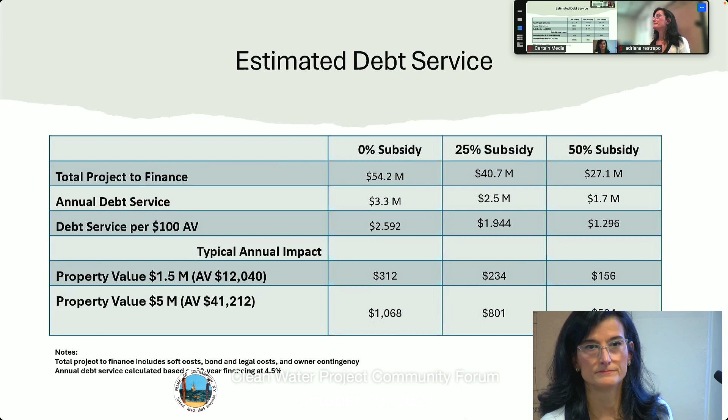Yeah, let me maybe talk about that. And I want to give credit to Ed Moneypenny and Rob Brady and the committee who have been working on this. So the concept is that the village as a whole is funding the capital work to build the plant.

And as Adriana said, the average, if you look across the county, is about 50% of the cost gets covered in public grants. The current town supervisor is somewhat of a hero in her village because she ended up getting 100% of the cost covered by outside money, but we're not assuming that. So that's the 50% column. So that cost is borne by the entire village.

We, thanks to many in this room, many of you who have worked at it over the years, have an excellent credit rating in this village, so we can finance at a very low cost. And then the annual operating cost gets covered by the people who are served. So the 250 parcels within the service district pay for the annual operating. And so when you see the cost at the end, I think it's $500 and something for a house that's about a $5 million value a year. That's to cover the bond issue.

So it's not a large cost, but we want to be totally transparent - there is some cost to it. So what we're doing in effect is what the work Chris is doing and the village has been doing is to treat the nitrogen when it gets to the lake. This is to make sure the nitrogen never gets there.

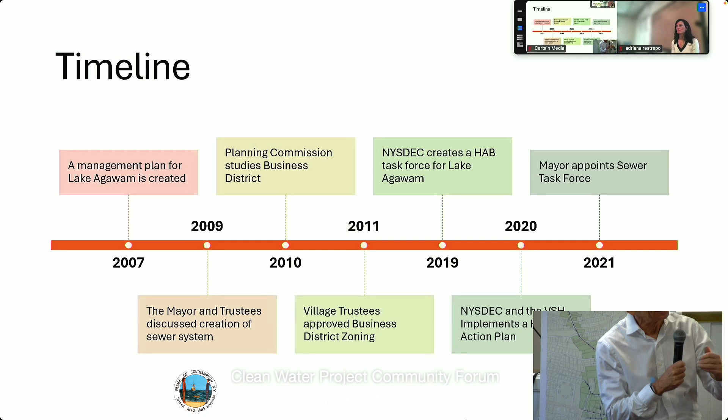So starting in 2007, and I think then in 2009, we adopted the Village Center master plan and did a zoning that really downzoned in effect the village business to guide that. And then further, much further on in 2020, 2021, and getting to, I think, last year, the village looked again at its overall master plan, and that created further controls for the village business district.

So there's limits now to what you can build. The numbers that Adriana quoted, the 150,000 current usage, which is really in part based on the Suffolk County Water Authority. The 195 eventual use is looking at every parcel and how much could be developed under the new zoning. So that's the eventual build out 30, 40 years from now, your kids or whatever may see. I doubt any of us in this room are going to see.

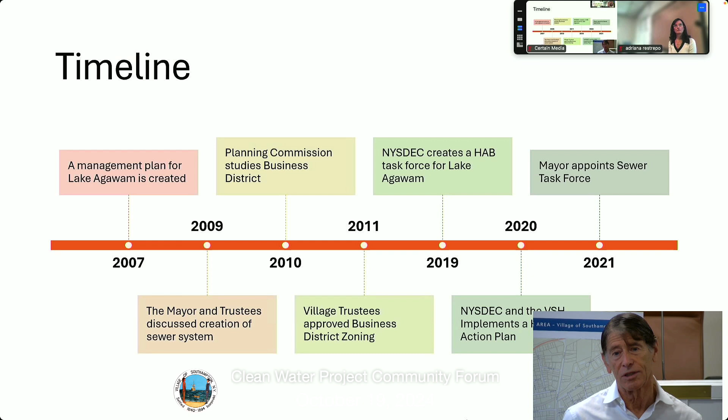Yeah, also to go with Paul and Roy's comment, that's why you have zoning. It shouldn't impede, sort of say, modernization. Zoning should go hand in hand. You shouldn't let the possibilities of a better system just run rampant, because that's why you have zoning laws. And that can include height limitation, use, character, everything the village has in place.

Parking is a big, significant part of that, too. Yeah, parking as well, because most of the buildings in the downtown business district don't have their own parking. They're relying on public parking. So there's those restrictions that are in place that are going to limit what you can do with your building. Definitely, plus use, plus height, plus character, all those things have to play into it.

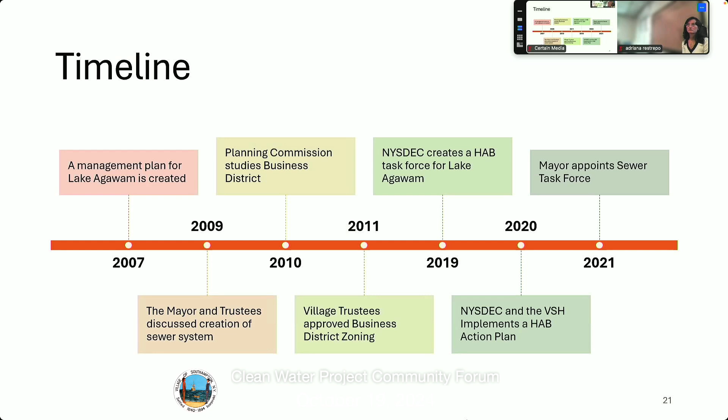I just wanted to add that when we did that village business master plan, it was very involved. People don't understand how involved it was. There were measurements of vestibules, of shops on Main Street and down Job's Lane. There were heights discussed, like a 3-story building on Main Street — you could only have the possibility of that at a certain distance to mimic what we have on Main Street and Job's Lane. The biggest concern was Nugent Street for development and Windmill Lane. So it was put into place that nothing could take place there unless it was exactly the way we have it on Main Street. So there really are limitations as to how that development can go forward.

And that was done because we knew sewage treatment was coming, and we did not want to give the green light to all of these people coming in and developing and putting up high buildings. We were concerned about that.

Can I ask maybe either our engineering expert or Dr. Goldberg? I know the clear and present danger is the harmful algae blooms caused by nitrogen, and that's a big impact from the sewer. Can you talk about some of the other things that a sewer plant does in terms of either forever chemicals, prescription drug loads, the other benefits that come along besides just reduction of nitrogen?

The plant has limitations not only on nitrogen, it has limitations on total suspended solids, so you're not overloading with sediments. It has restrictions on biological oxygen demand, which is like the organic portion of the effluent. There have been new standards for things like forever chemicals that may come as part of the health department standards for the plant as well.